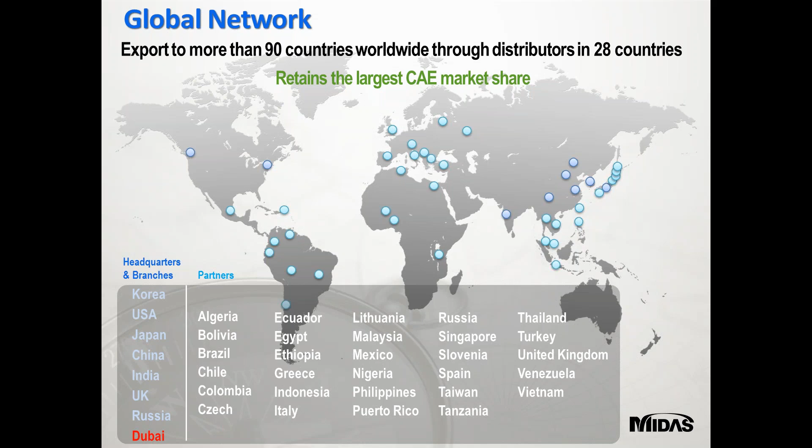Coming to the business area of Midas, it includes both engineering and consultancy and software developments in bridges, buildings, geotechnical, and mechanical engineering as well.

As I mentioned earlier, both consultancy and software development combined gives a very good synergy to obtain optimal solutions for practical engineering. That means in Korea, we have both software development and engineering consultancy service, which makes a very good synergy to obtain practically facing solution problems and sort out the solutions.

Coming to the product line, we have building and structural engineering products such as Midas Gen, which is a flagship product, named as integrated design system for buildings and any kind of general structures. Followed by Midas Design Plus, it's a structural component design and detailing tool. And coming to Midas D Shop, it's an auto drafting module.

In bridge and civil engineering, we have Midas Civil, which is again a flagship product for bridges and any kind of civil structures. The other one is Midas FEA, which is famously used for nonlinear and detail analysis system.

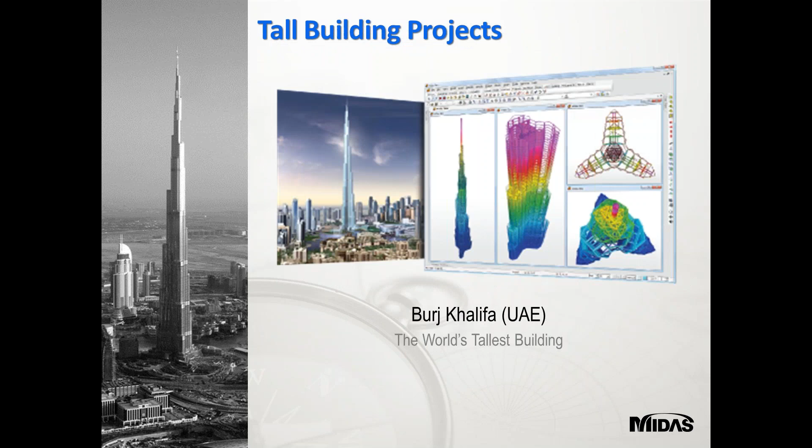These are again some of the applications where Midas Gen has been used: Burj Khalifa UAE, the world's tallest building, and Moscow City Palace Tower, Russia, a twisting 46-story building with composite columns. And coming to Gansu Twin Tower, China, a 103-story multi-use building.

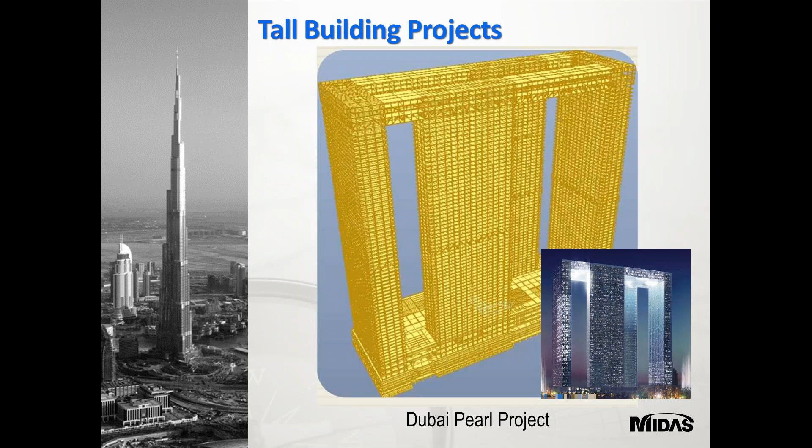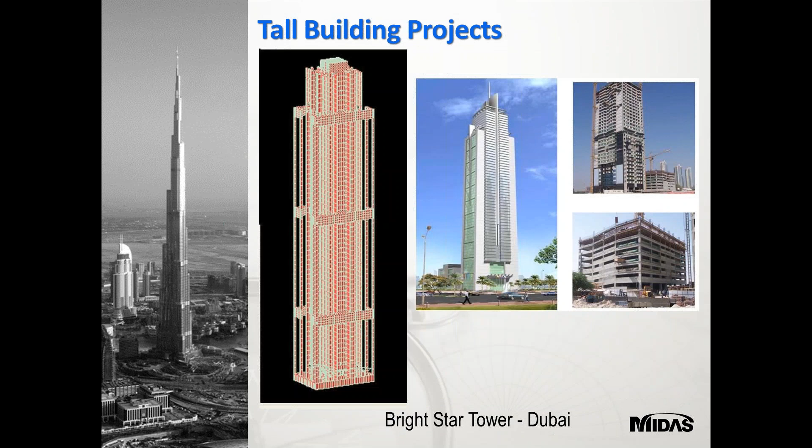And Dubai Pearl Project, and Rolex Tower, Dubai, ADFC building, and Signature Tower, Dubai. And coming to the other building, it's Bright Star Tower, once again in Dubai.

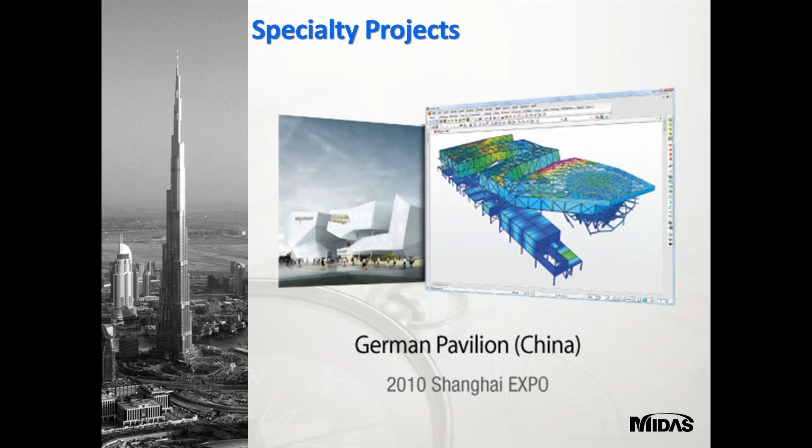And coming to Midas Bridge software, one of the flagship products, once again I would say it is Midas Civil, wherein the applications are Sutong Cable Stayed Bridge, China, Russky Island Bridge, Russia, and Sunda Strait Bridge, Indonesia.

These are some of the application areas for Midas Civil, like conventional bridges. You can do curved steel girders, composite integral bridges, PC girder bridges, and segmental post tensioning with BCM method, ILM, MSS, and FSM method. Also cable stayed bridges and extradosed bridges can be performed using Midas Civil.

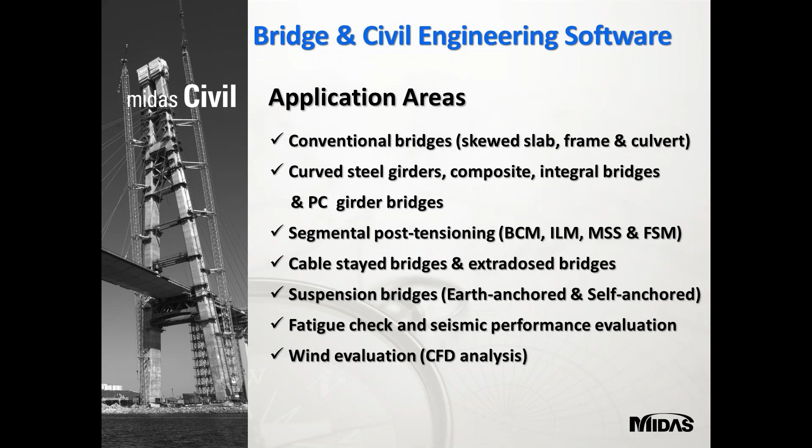And not only those, suspension bridges and fatigue check and seismic performance evaluation, and also wind load calculations can also be performed in Midas Civil.

Coming to geotechnical engineering software, we have application areas in Kingdom Tower, Saudi Arabia, where foundation design has been performed using Midas GTS NX, and also in New York subway, Midas GTS NX has been used, and also King's Cross Station in UK.

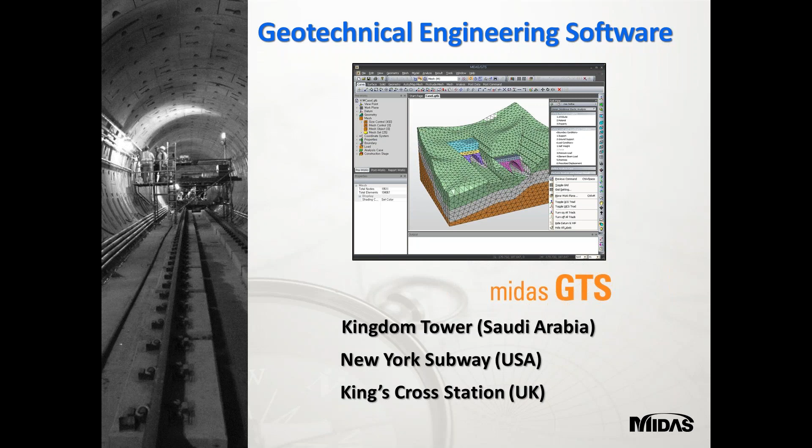Coming to the application areas, tunnel design you can perform in Midas GTS NX, and slope stability analysis and seepage analysis and design, like soft ground analysis, foundation and dynamic analysis, and also coupled analysis. In this way, I would like to proudly say that Midas provides complete civil engineering solutions, that is from substructure to superstructure.

Not only civil software solutions, but also we have mechanical engineering software solutions, which Samsung Electronics, Hyundai and Kia Motors are using. Also LG Electronics has been using Midas mechanical softwares.

Some of the application areas of Midas mechanical softwares are automotive and heavy industries, shipbuilding and maritime engineering, aerospace, electronics and environment and thermodynamics, and medical device and biomechanics.

The upcoming projects using Midas are Kingdom Tower, Saudi Arabia. As I mentioned earlier, it's the world's tallest building with 1 kilometer vertical height.

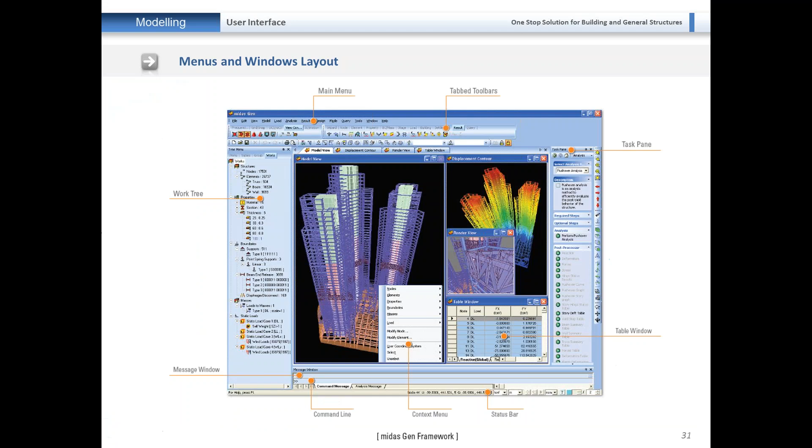This is the user interface of Midas Gen, where it provides various menu systems and windows for a user-friendly workspace. In addition, it provides supplemental windows such as tree menu, task menu, and a toolbar. I'd like to mention the task menu, which displays a work procedure for analysis, advanced analysis functions, and descriptions of input items. This helps the user to work more easily and comfortably.

I'll just open the software and click on new file.

If you see here, this is the main menu where view, structure, node element, and all the main toolbars are visible for you. And if you see the procedure of the alignment, this is the way to proceed and get the project done.

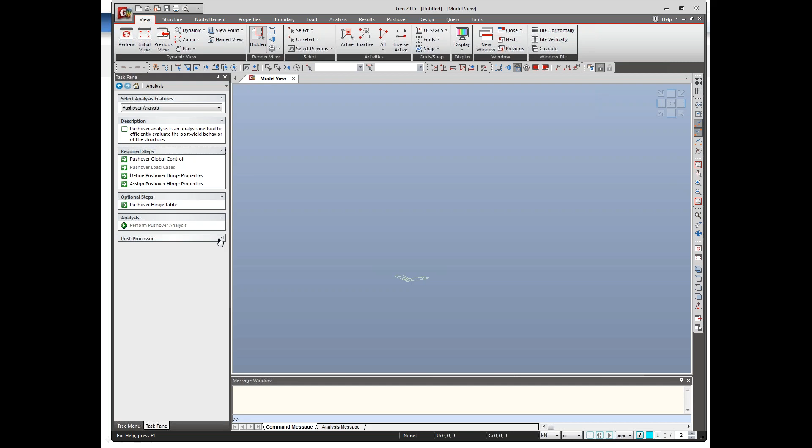These are some of the optional steps for you. You just need to perform analysis, not only pre-processing. Post-processor details are also available here, showing what results we need to go through after completion of analysis. All this kind of advanced analysis can be performed quite easily using Midas Gen.

For example, if you want to perform nonlinear time history analysis, you can directly see the required steps and optional steps, and also what results to check after analysis, even if you're not familiar with this advanced analysis.

Okay, now let's move on to another slide. These are some of the various useful functions and windows.

I'll let you know all the more useful interface during the demonstration. If you see here, these are some of the views. While modeling a brief project, we can go through all these features.

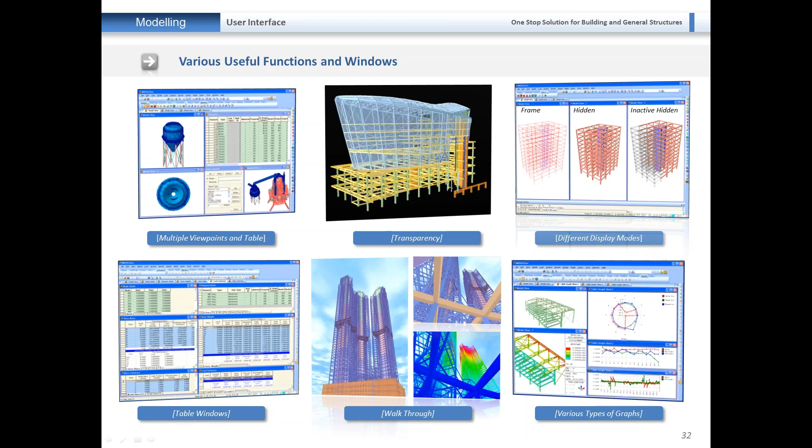Coming to data exchange, file manipulation is very crucial these days, since various engineers work with various softwares, and Midas Gen can fully handle file manipulation as well. Midas Gen provides direct data transfer with Tekla structures, Revit structures, and STAAD, importing and exporting AutoCAD, DXF, MSC Nastran, and also one can create an MGT file after completion of the project, and export the Midas project to some other softwares as well.

If you see in the software here, you have an import option. If you click on import, you can import the Midas Gen file itself to get a model, and also AutoCAD DXF file, SAP 2000, and STAAD file, MSC Nastran file. You can also export the Midas Gen file to Midas drawing file and AutoCAD DXF file, and export it to a Midas Gen MGT file.

These are some of the useful features.

Coming to the export and import between Midas Gen and Revit Structure, you can directly import a Midas Gen model to Revit Structure, and from Revit Structure to Midas Gen. Once after completion of the purchase of the software, we'll provide you a link from Revit Structure to Midas Gen, and you can simply import a complete model from Revit to Midas Gen through the provided link.

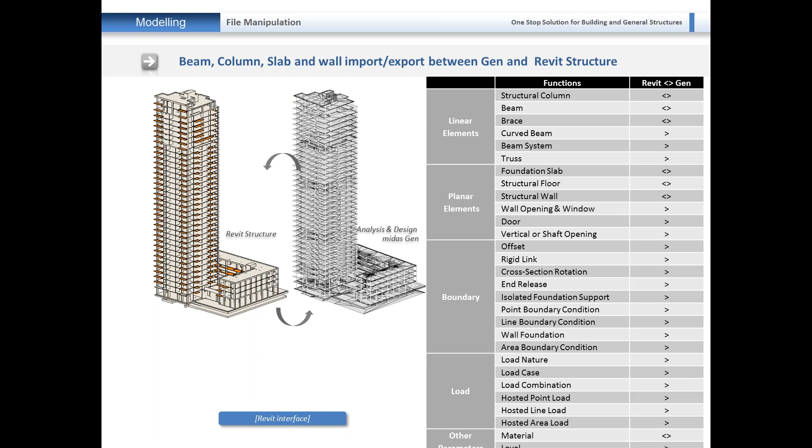For example, merge data files. In a complex project, a number of engineers can work on specific parts at the same time, and we can then merge the individual files into one analysis file and perform the analysis. Text type input using commands is also carried out through the MGT command shell, and the entire model data can be entered or produced in the text format of an MGT file.

Here are images where you can clearly see this project has been divided into various stages, and after completion they can simply merge it into a single analysis file and get the output.

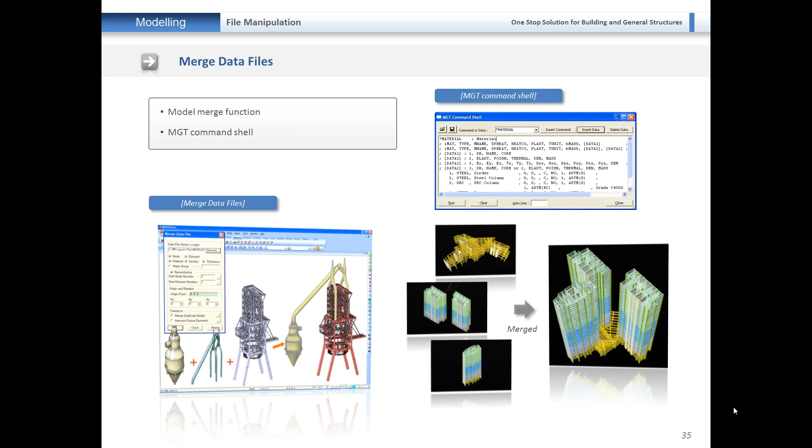Coming to material data definition, we have different standard databases, that is BS, American standards, Euro standards, IS standards, Korean, Japanese, Chinese, and all. We are also continuously adding more databases step by step as per requirement.

From here, I'll start the demonstration. I'll go to Structure and define a grid for you, that is Define Line Grid. Click Add and name it Global. Then click on X grid lines, click Add on X grid lines and give 5@3, click OK. Then add Y grid lines by clicking 4@3, click OK, and here the required coordinates have been obtained. Click OK, it has defined the grid, and if you need to apply right now, just click Apply. The grid line has been applied.

Click Close. See the usefulness of the work tree menu - I'll click on Toggle Work Tree. Here you can see the works you have defined.

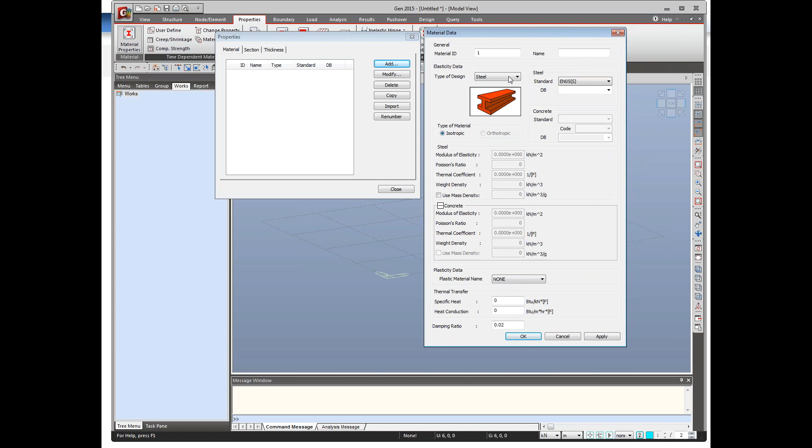Now I'll simply go to Properties and click on Material Properties. Click Add, and I'll define a concrete material property using Eurocode 4, C30/37, and you can name it if required. Click Apply and then Cancel.

Coming to the section, I'd like to define section properties for beam and column - user defined sections, solid rectangular. First, define the beam: depth 0.7 meters and breadth 0.23 meters. Click Apply - I'm clicking Apply instead of OK because the dialog box would disappear and you need to define other properties as well. Then click on Column. Define the column size as 0.45 depth and 0.45 breadth. Now click OK, and you can also define offset properties.

Here, if you click on center to center offset, or you need to move the offset from center top, or like center to center, center top, or left center, you can define this through change offset properties. As of now I need it as center to center. Click OK. Not only these, but we can also define several other section properties.

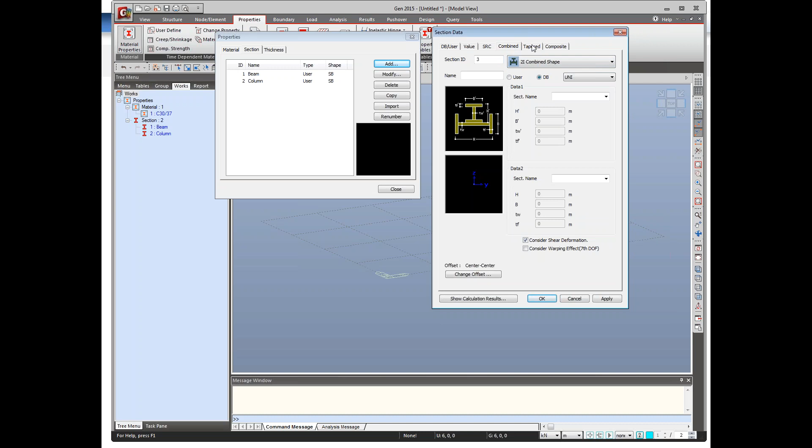You can have different types of sections like angle, C channel, I section - these are value input sections. You also have angle sections, channel sections, and combined sections, like combining two I sections, two T combined sections, and IC combined sections. These are some of the huge database section properties available. Not only sections but also material properties are available, and tapered sections also have a huge database available - you can define tapered sections as well, and composite sections can also be defined.

Click Cancel, and I need to define a wall element, so I'll give the thickness of the wall as 0.2 meters. Click OK, close. Now I'll go to Node/Element, then I just need to click on Create Element.

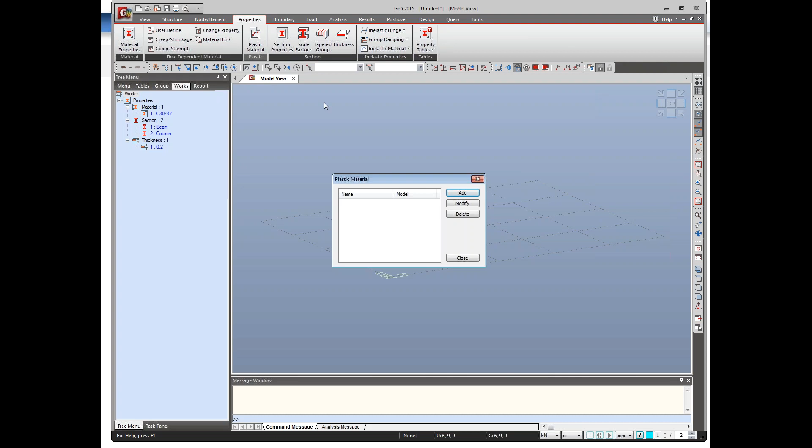I'll show you some other features in Properties. You can define plastic materials as well, like hinge properties which I mentioned - you have hinge properties to be defined over here. Plastic materials you can define like masonry properties - for masonry structures you can define masonry properties over here, and different types of tapered groups you can create, along with hinge properties. All of these can be done in Midas Gen.

Now I'll go to Node or Element, just Create Element. You can save it as auto save, or you can just save it manually - again, it will not ask.

I'll just save it on desktop. Now I'll click on create elements, and we need element type as general, beam or tapered, and the material property is same for both, and I need to create beams.

So what I'll do is click here to here, and again here to here. I'll go to top view for more clearance, and click here to here and here to here. This is the very easy way to create a grid.

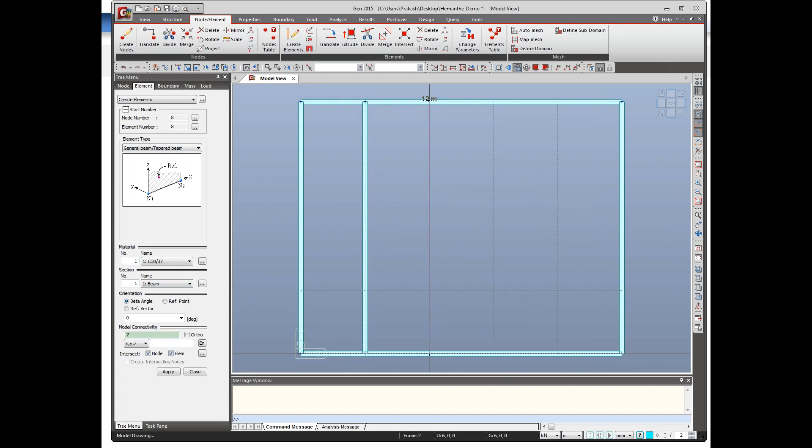Not only this, I'll show you some other way to create a grid in Midas Gen. Actually, I'm familiar with this method, so I'm quite comfortable with it, so I'm using this method.

Not only this method, I'll show you, if you go to structure, here we have base structures, like you can simply give beam, you can give the inputs as per your requirements, and you can get a single beam. For example, if you want to define a frame, you can give it input data and edit it, generate frame, then insert it at your required point.

Okay, I have a grid over here, and what I'll do is click grid line off. So the grid line has been turned off, and now I need to create columns.

So what I'll do is go to node or element, then extrude elements. See the smartness of the software. I need to extrude columns in minus Z direction. So I'll set extrude type as node to line element, then element type as beam, and material is once again the same.

So beam, generation type same, equal distance, and dz I'll give as minus 2 meters. Now I need to click on select all, so only the nodes will be generated as line element. Just click apply. See the smartness of the software. The columns have been created.

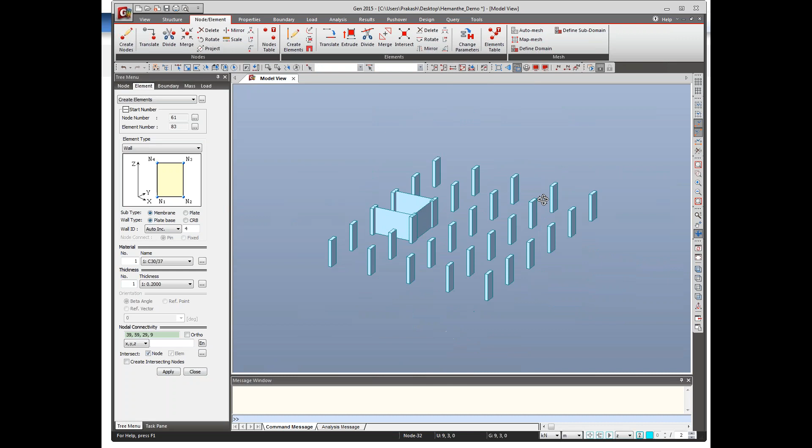So you can simply select those columns and click on delete. This is how you can delete the unnecessary columns. Just click on activate all. Here your original structure has been created.

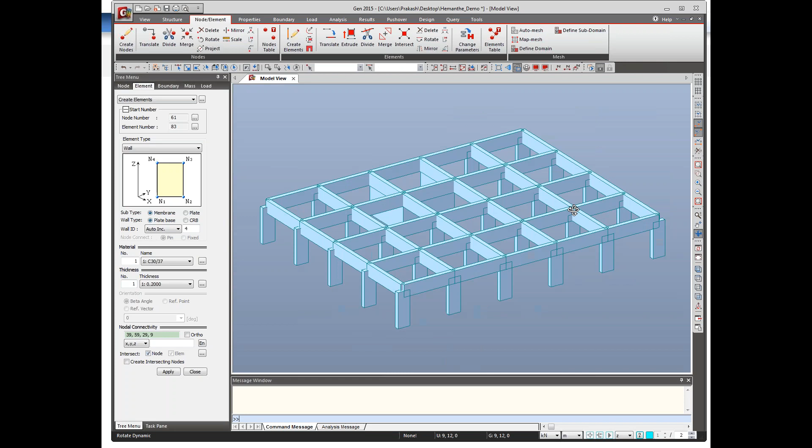Also you can delete the beams which are unnecessary. Like you can select, sorry, I need to click select none, then select the beams which are not required for you and just click on delete. So the beams also got deleted.

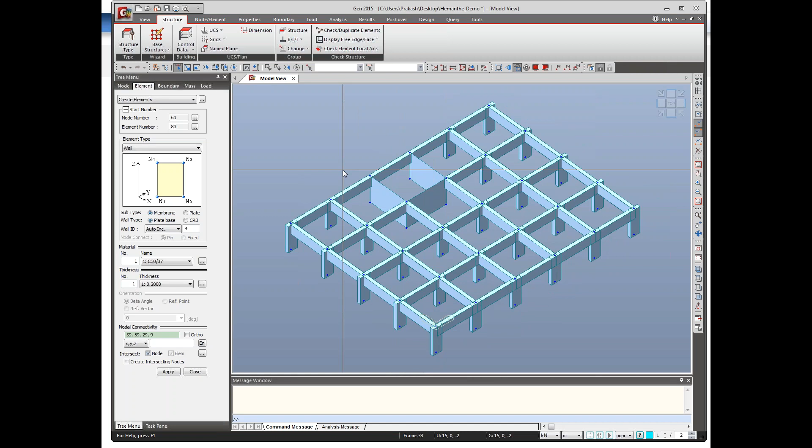Okay, and for the structure type, before analysis you can click on convert self weight to masses. You can click OK, or else you can click here, like for alignment you can select all these options and just click OK. Now the alignment is aesthetic for you.

Okay, now I'll move on to the presentation. The initial base structure is ready with us. Now how easily you can turn it into a building, that's what we'll look at in our next step. So now we'll move to the presentation.

So as I told you about the material database and all, I'll just move on. And also you can define time dependent materials for steel and concrete as well.

Coming to the section data, as I told you, we provide most of the section database, including Europe, America, Canada, Asia. The section database includes I sections, T sections, angle, channel, pipe, and so on. We can also provide various combined sections for steel members and tapered sections for modeling haunched beams as well.

For example, each and every time we'll try to include more and more database, whatever we get.

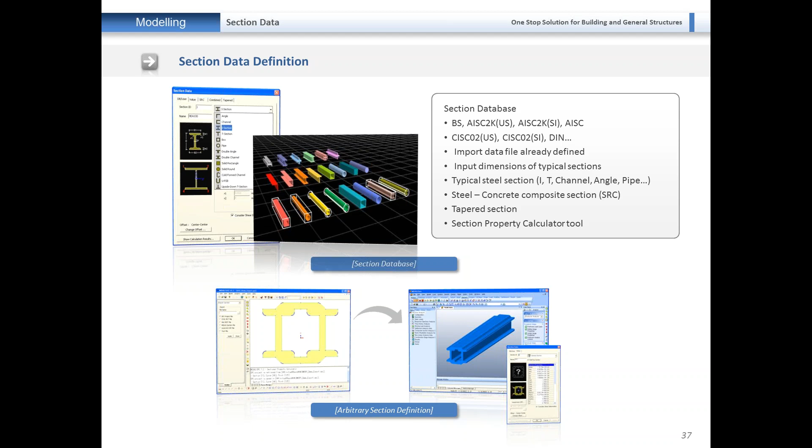Coming to the wizard options available in MidasGen, these wizards help you quickly generate models, reducing modeling time for typical shapes. Using the structural wizards, unit structures such as frame, arch, truss, plate, and shell elements can be simply modeled.

As shown earlier in the software, if you go to structure and base structures, you have plate and shell elements. Using shell elements, you can simply model a water tank structure and just apply hydrostatic pressure loads. You can also simply model plate elements as well.

Coming to slab modeling, there are two ways of modeling slabs in MidasGen. One is to model the slab using plate elements, and the other is to exclude the slab and consider it as a rigid diaphragm.

The property of the rigid diaphragm is that it transfers lateral loads to the beams and columns, and the mass data are automatically entered at the diaphragm centers. The center of mass is automatically calculated for each story, so you need not worry about it; the program automatically considers the center of gravity.

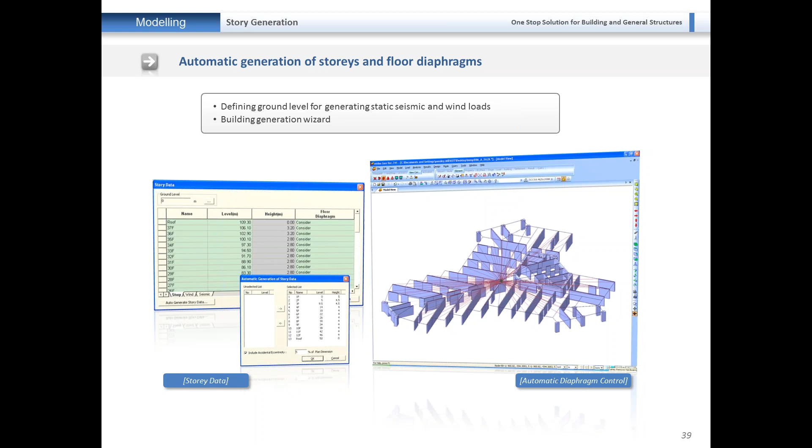Coming to mesh generation, it's generally quite difficult to create plate elements, but in Midas we have options like auto mesh, planar area, and map mesh 4-node area. For connectivity between slab and wall members, the program smartly takes care of it. You need not worry about the connection between meshed and unmeshed elements; it automatically handles nodal connectivity.

I'll show you those options as well. If you go to node or element, here you have auto mesh planar area. For type, you can define quadrilateral, quad plus triangular, or triangular line elements or planar elements. For map mesh, you need to select 4 nodes and then perform the mesh.

Define domain and subdomain. This is used when it's required for reinforcement, for example, when your structure is at 90 degrees.

For example, your structure is like this, then here you need to give the reinforcement along the x-axis, and here you need to give the reinforcement only along the y-axis. So you can define this entire thing as a domain and this as a subdomain, changing the angle direction. That's how it's quite smart and useful for reinforcement.

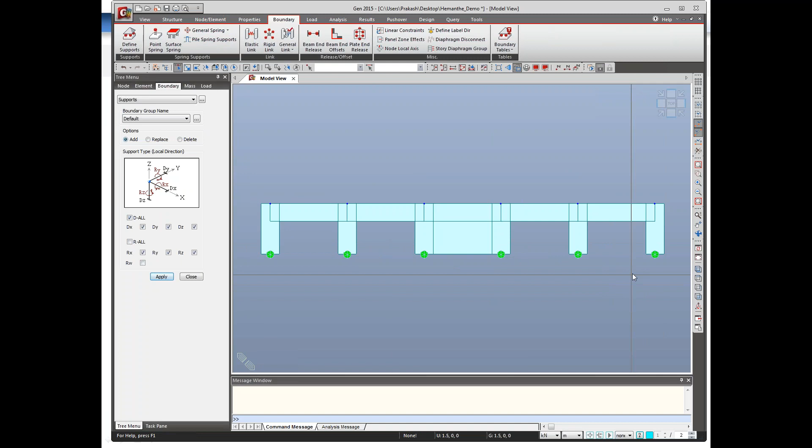If you want to see it in all directions, you can see your supports have been defined. If you don't want to display these supports, you can go to the works tree menu and undisplay them, so they won't be shown for you.

These are some of the options for spring supports as well, and elastic links, rigid link, general link, beam end release, all these things you can perform. Panel zone effects, where you don't want to consider the moment, you can give it as a panel zone effect. Diaphragm disconnect and story groups, you can also do in the software.

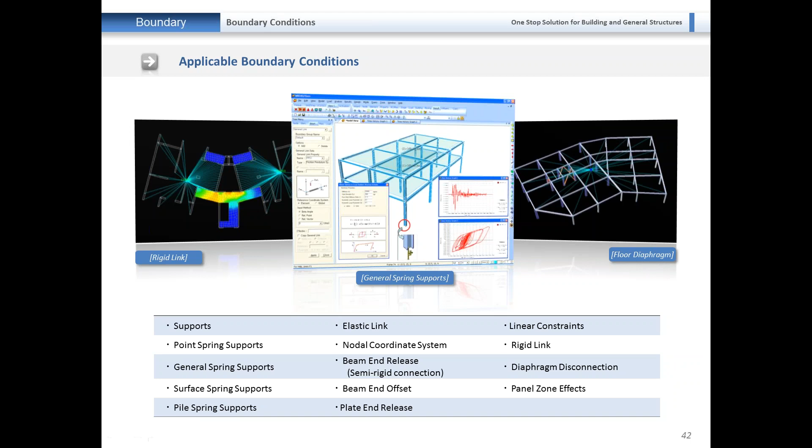Coming to the presentation: pile spring support considers soil stiffness, and nonlinear characteristics of springs or the pile height are automatically calculated in MidasGen.

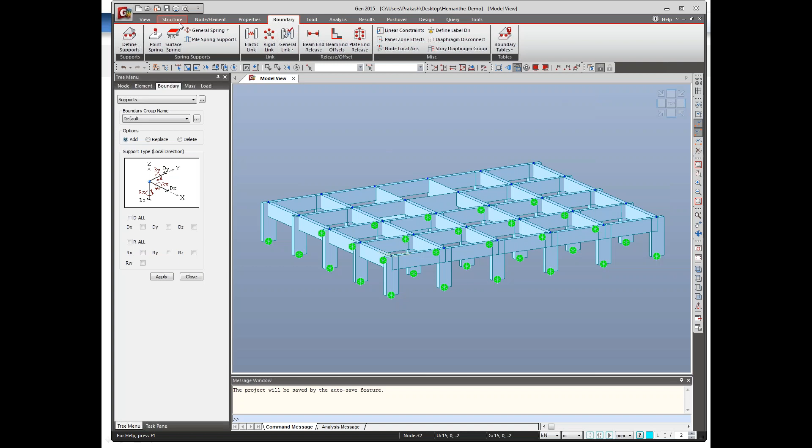Before that, I would like to generate the building. See the smartness of the software: I just created the base floor, so now I need to generate the building up to the top.

The number of copies is how many stories you want to create for your project, so here you can give it as 5, meaning 5 stories have been created. The distance along the Z direction is the distance between 2 stories; you can give it as 2 meters and click on add.

In the similar way, you can define other copies, for example, 2 stories at a distance of 3 meters. Just click OK, and if you click on this, you can get the building generation table showing how many stories you have and the differences between them.

Copy node attributes, element and building attributes. If you have any supports or anything else, they'll be copied to the entire stories, like static loads. Since I haven't defined my loads, I'll use an alternative method to generate loads. Just select all.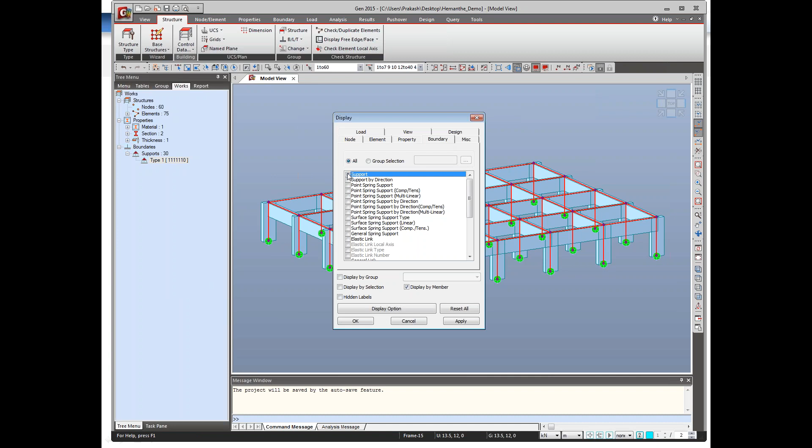I'll go here, go to boundary, and just click apply. Click on unselect all. Select all, control data, building generation. Give it as 5 copies and distance as 2 meters, click add, click apply.

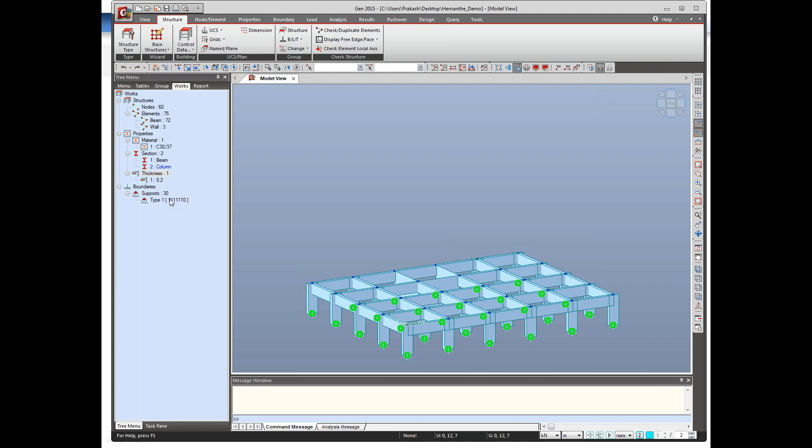So here your building has been generated in a smart way. The supports have also been copied, but we don't need the supports till the top level. So what I'll do is undo this step, undisplay supports, and then click on select all.

Before that, columns haven't been assigned, so I'll unselect all and give it as Z and select all. Walls I'll unselect. I'll right click and give assign. Now to check whether it's assigned properly, just double click on that. You can see the columns have been assigned with

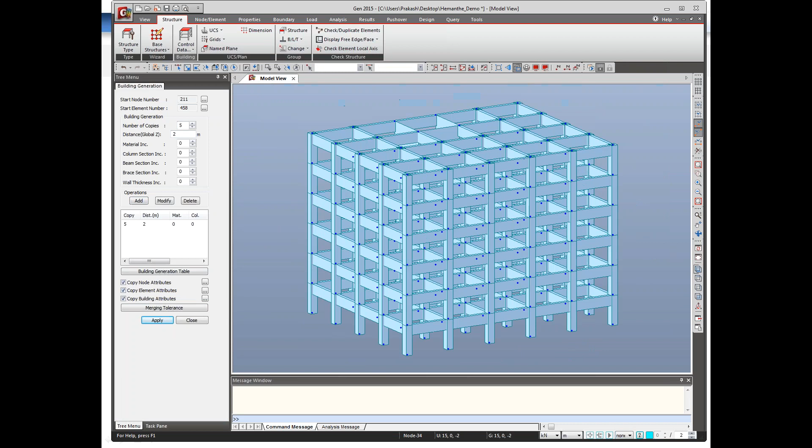required properties. Now I'll unselect all, click on none, go to building generation, 5-story, 2 meters, click add, click on select all and apply. Your building has been generated, and the supports are also

I'll delete the supports and define them here now. Go to boundary, define supports, apply. Your supports are also defined properly. This is the advantage of your workstree—everything can be handled using workstree.

Now going to the load properties, I'll define different load cases: give dead load and click add. Once again live load, click add, and wind X, click add, and wind Y, click add.

Live load, modify. Wind load on the structure, modify. Wind load on the structure, modify, and EY, earthquake, EX, click add, EY, click add. These are the required load combination load cases for me.

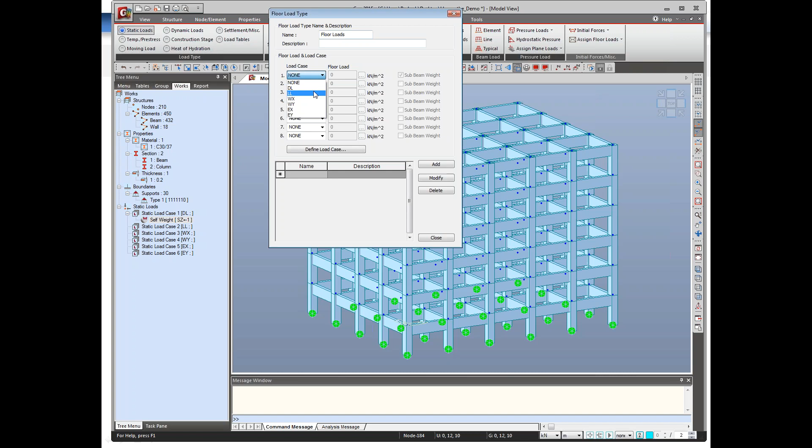So I'll give dead load as -4 and live load as -2 kilonewton per square meter, click OK, click close. What I need to do here is create another one for SIDL. You can give it as dead load. Click OK, close.

So define floor loads. You can select this and modify, SIDL, modify. Okay, these are my floor loads, and again I will define my roof loads as -5 and -2. Add. Floor loads and roof loads I have added, just click close.

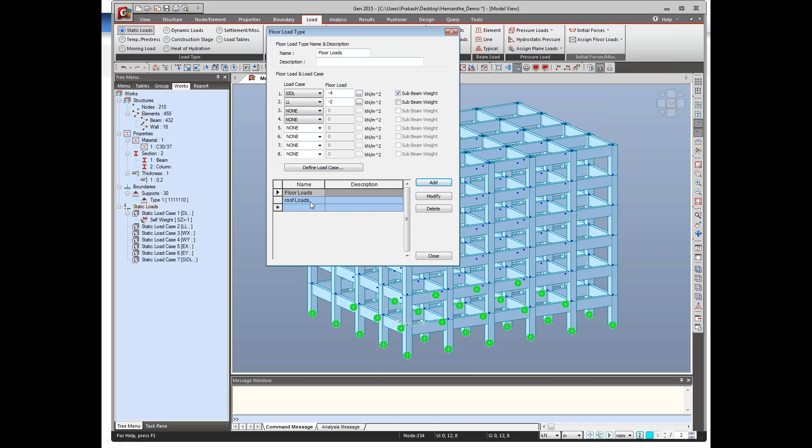So your floor loads have been defined. Now go to assign floor loads. I would like to assign the distribution as two-way distribution, though you can also define it as one-way. Just click on allow polygonal type unit area, and here is a smart option again. If the loading is inclined like local x-axis, you can define, or local y-z, and as of now I need it in global Z direction.

So I'll just click on this. Before that, I'll select this part, stories 1, 2, 3, 4. I'll activate this—this is my part that I have to distribute. Before that, I would like to activate and give the distance as 4 at the rate 2.

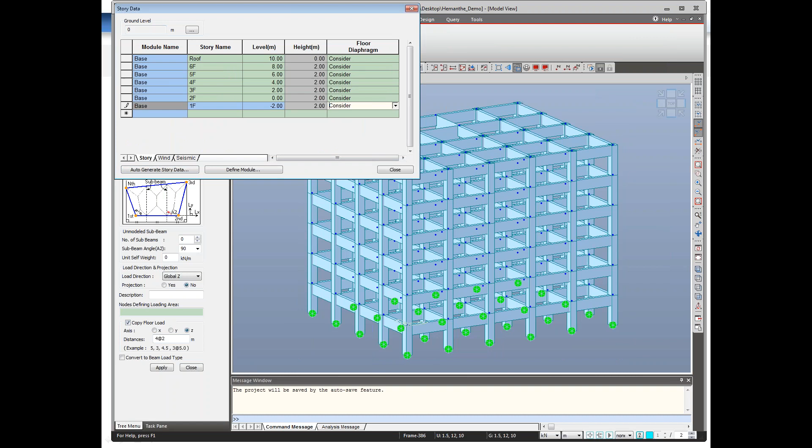Just click on activate all, and here you have to generate the story data. Click on auto generation story data. Your story data has been generated—this is the floor diaphragm which I have been talking about. You can select whether you need to consider it or not. For the roof also I would like to consider it, so I'll click consider, close. So now the story data has been generated, so you can look after your stories.

So here I would like to activate it by identifying a story. I'd like to activate the first story. Just click on activate all, then click on activate. First story, you just need to select floor and click on activate.

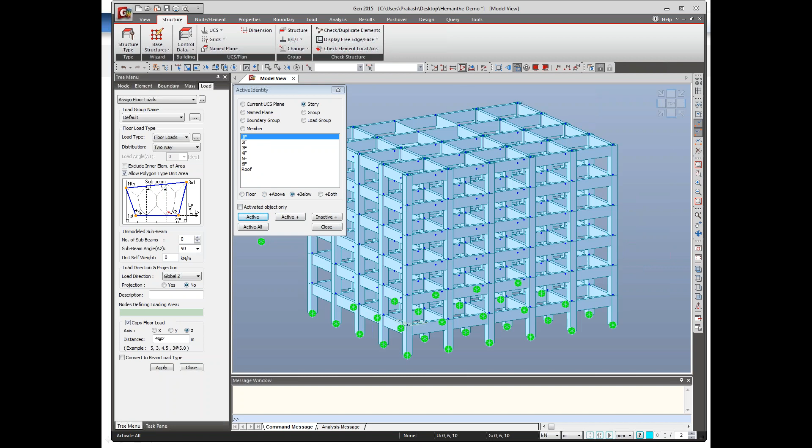There are many options available for us. Just select all, and I'll select this story, and I'll just click activate. So this is the story.

You need to apply the floor loads. Just click over here and apply your floor loads. The floor loads has been applied. Yeah, this is the way you can apply your floor loads.

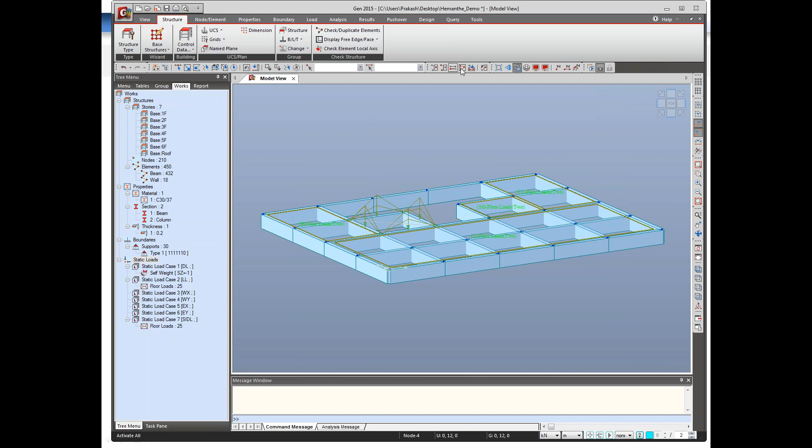Has been applied, and now I would like to click on activate all. The roof load haven't been applied, so I'll just select my roof. Just click on activate all. Go to top view. Here I'll assign the roof load. Roof loads, similar way.

Here I haven't selected the wall element. You can even select the wall element, and you can assign the floor loads. I haven't selected the wall element over here. You can select it, and one can assign it actually.

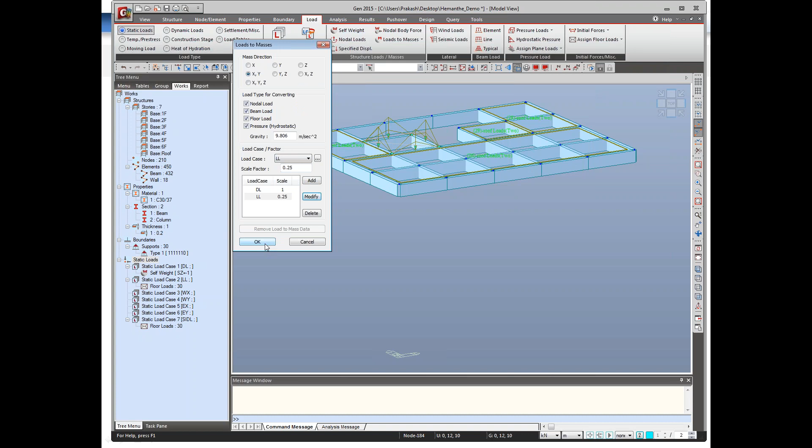Now I would like to click over here, load to masses for seismic analysis. Give dead load as 1 and live load as 0.25, and just click add. Click on modify. And if you want to define other loads as well, you can just define, click OK, activate all. Here you can clearly see that all the loads has been lumped as masses.

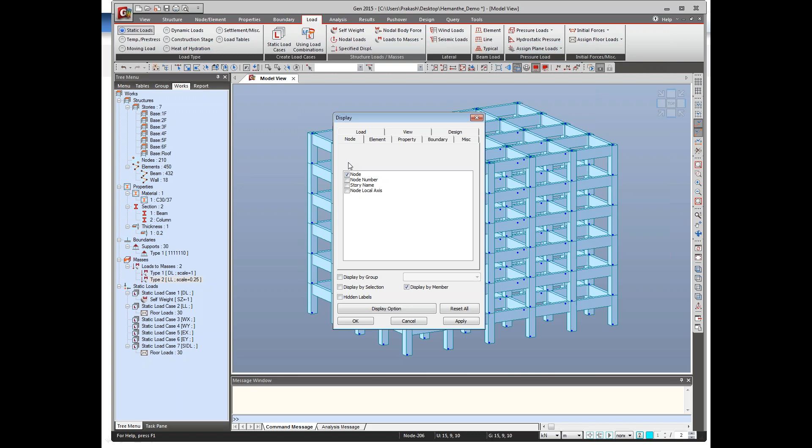Okay, and here we go. I'll define wind loads. Just click add. Okay, before that I'd like to go to presentation.

As I already mentioned about loadings and all, this is the floor loads, pressure loads and hydrostatic loads which you can easily define and apply in MIDAS-Gen. The floor loads are then automatically distributed and applied to the individual beams, girders and columns. This surely leads to speedy analysis and design.

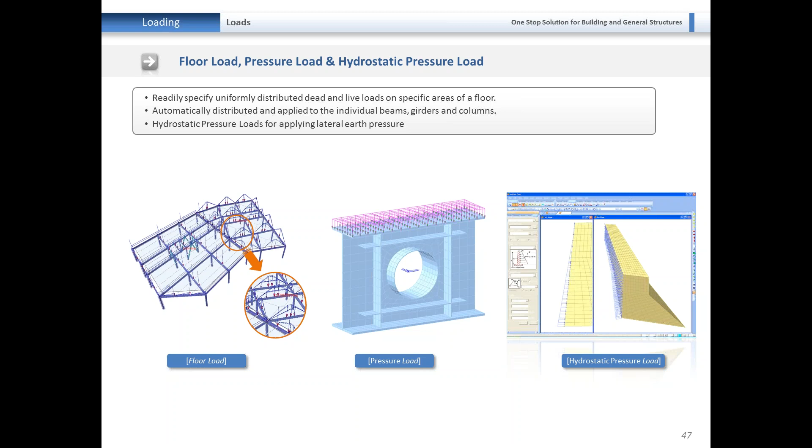Coming to static wind and seismic loads, MIDAS-Gen generates static wind and seismic loads on building structures for each story. All one has to do is provide the applicable standard and the story data so you can automatically create static loads. Coming to the response spectrum load cases, principal axis of the building are generally two mutually perpendicular horizontal directions in plan of a building along which the geometry of the building, and in MIDAS-Gen there is a smart option, auto search of principal axis.

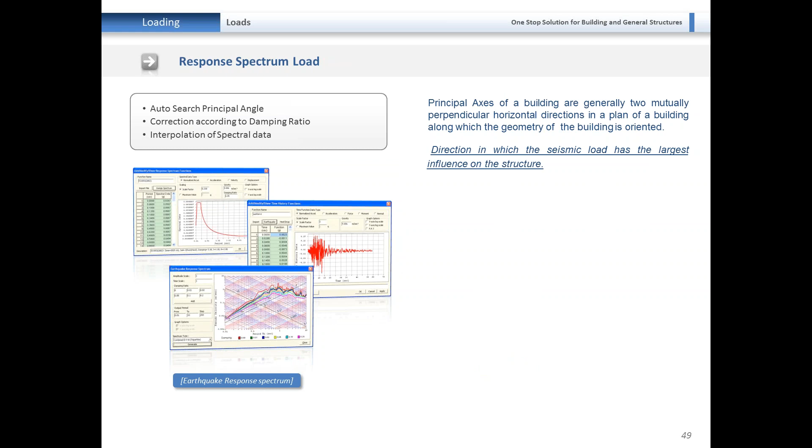For example, if your structure is irregular and you cannot find the principal axis, for a structure like this you can give Rx as 0 and Ry as 90 degrees, but for a structure like this you cannot define the principal axis. In this case the program helps you to define the principal axis, using the auto search principal axis option, which will help you define it automatically.

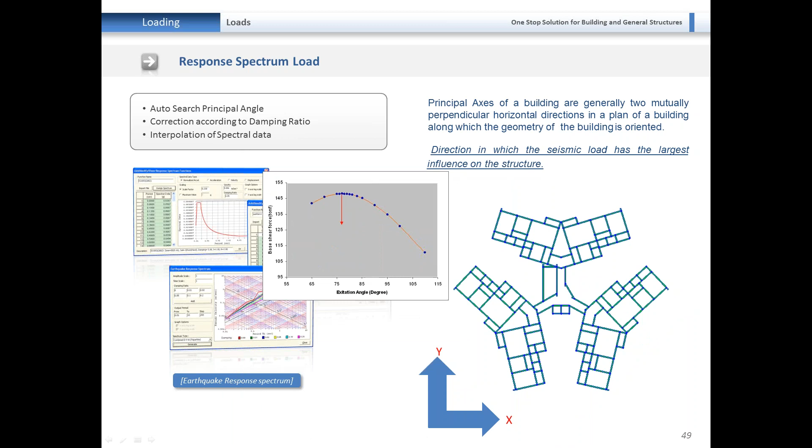These are some of the irregular structures where you can define the principal axis. Coming to the response spectrum load cases, you'll get a graph over here, and according to that you can define the load cases. These are the methods of the software used in MIDAS-Gen.

You can even get interpolation of spectral data using linear method or logarithmic method. I'll just show you all these techniques while defining the load cases. These are some of the dynamic load cases. Seismic analysis considering dynamic loads can be handled by the program.

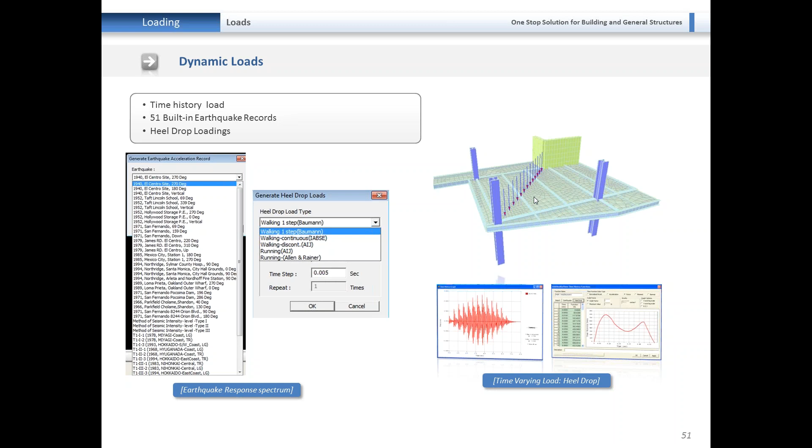This model has been made for evaluation of floor vibration due to walking load. This shows the walking load path for you. There's a time history function dialog using time history load cases and analysis.

Coming to the analysis capabilities, before that I will define wind load cases in the program. Just click add. I'll just do it quickly. The time is getting out.

Just select Eurocode, Wind Load X, and you need to define your terrain categories and all the inputs you need to provide. Here you just need to click on apply, and you can see the wind load profile, showing story force, story shear, and overturning moment.

In the same way, you can see the method as well, SRSS, square root of sum of squares method, or X direction, Y direction. The important thing here I would like to show is make wind load calculation sheet. If you click on this option, you will be able to get the wind load calculation sheet, like as per Eurocode, what formulas have been used and how the story force and story shear have been calculated.

I would like to mention that the program is not a black box. Everything you can get, like a calculation sheet, to see what formula has been used and what result has been obtained. All these things can be visible, and you can even take a printout of this or save it as a Word file.

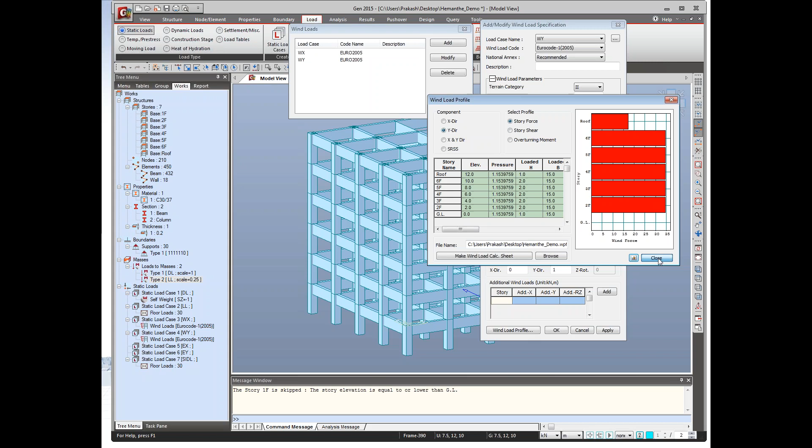Okay, WX has been applied. I'll just select WY, and here I'll give X as 0. Just click apply. WY has been applied. In the similar way, you can check out both wind load calculation and story force. Just click cancel, just click close, or you can modify it as well, like Y direction, I'll give 0.

Just click OK, close. Now coming to the seismic loads, the same way you just need to click on seismic loads and click on add. EX, the load case, the code you need to select is Eurocode, the latest one. And here you need to select the fundamental time period formula. I would like to use the first formula, so just select first formula and then just click OK. And along X direction, so Y will be 0. Just click apply.

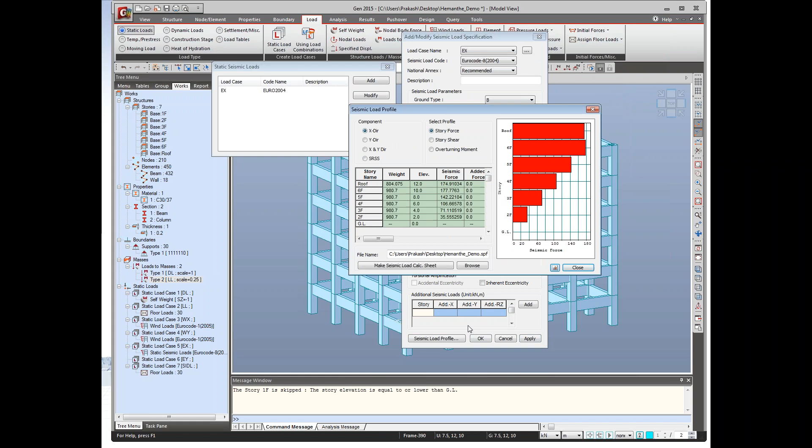In the same way, you can find seismic load profile, and also the same way you can provide seismic load calculation sheet with what formulas the program has been using. Here you can find out that the program is not a black box giving blind solutions - every output is visible for you. Just click close. Again, click on EY, and the same formula, I'll give X as 0 and Y as 1. And then just click apply, then cancel, close. See how easy I have defined all this.

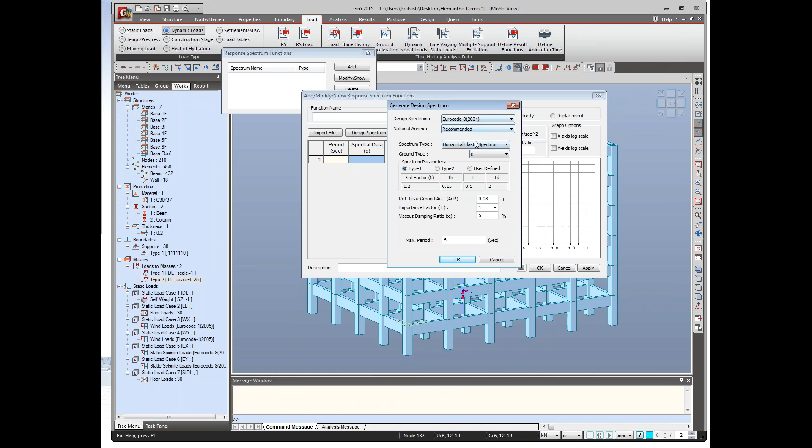Now go to dynamic loads and response spectrum functions. Just click add. And design spectrum, I would like to go for Eurocode latest one, and just maximum period I would like to define 6 seconds, and just click apply. Or else if you have any Excel file with the data, you can just import that file by clicking on import option. Just click apply and just click cancel, close.

And response spectrum load cases, Rx, you can give excitation angle as 0 and select this. Just click add. And Ry, you can give it as Y, 90 degrees. Since this is not an irregular structure, I'm giving it like as you know. And here I would like to define eigenvalue analysis control for modal participation factor. You can define 15 frequencies, and you can even define the method, whether Lanczos or subspace iteration or Ritz vectors method. Just click OK and click close.

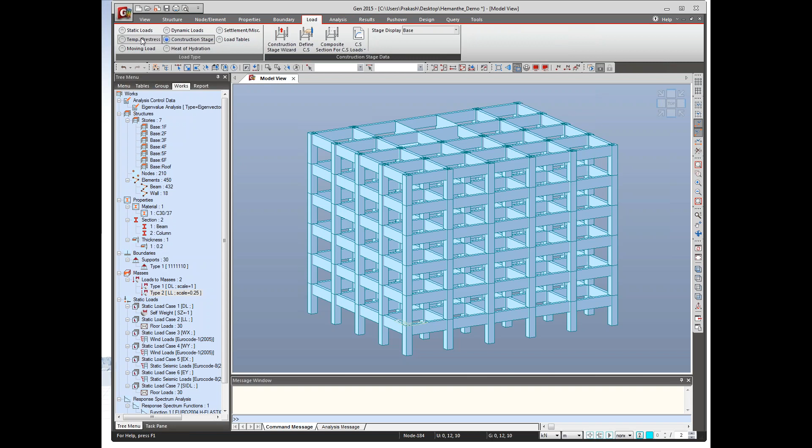Now there are different methods for dynamic analysis. One is response spectrum, which I have used now. Even you can go for time history analysis also. And there are different material settlement analysis you can perform, moving load analysis - this is advanced version of the software. The only difference is construction stage and moving load, construction stage will be added in the advanced version of the software. So now I would like to go for analysis, and analysis main control data.

You can define as per your requirements. And P delta analysis, you can perform buckling and everything you can do. I'll just click on perform analysis. Let us see how much time it will take to perform analysis. Yeah, the analysis has been completed, within very few seconds.

And here we can see some abnormal deformations. So maybe there might be some duplicate elements existed in the structure. So before running analysis, I'll just click on check duplicate elements. Okay, there are no duplicate elements. I'll just perform analysis.

Yeah, degrees of freedom, there are some issues with degrees of freedom. Anyways, this is the model file. I'll just open already - I had already performed the analysis file. Just open. I'll just go to presentation of the gen.

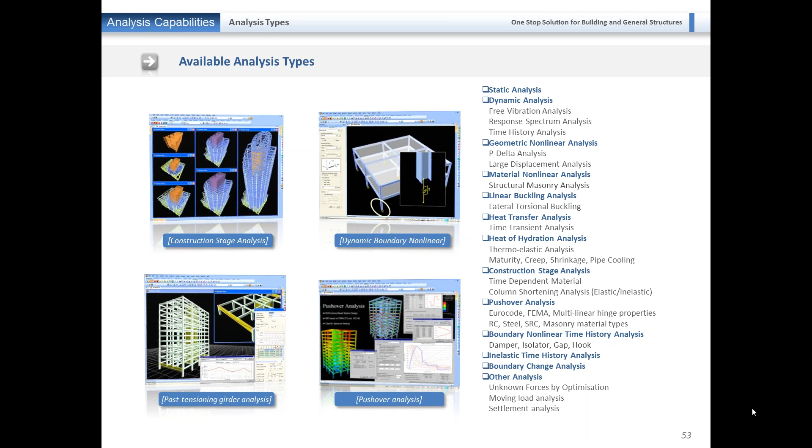Coming to the analysis capabilities of the software, MidasGen can handle high-end analysis capabilities such as construction stage, already I have shown you, and these are the list of analysis capabilities over here. These are some of the construction stage analysis, creep and shrinkage, and even floor vibration analysis can be performed. Serviceability of floor structures can be evaluated by dynamic time history analysis, and MidasGen provides a number of time history forcing functions for walking loads for floor vibration. And these are some of complete floor vibration analysis result display.

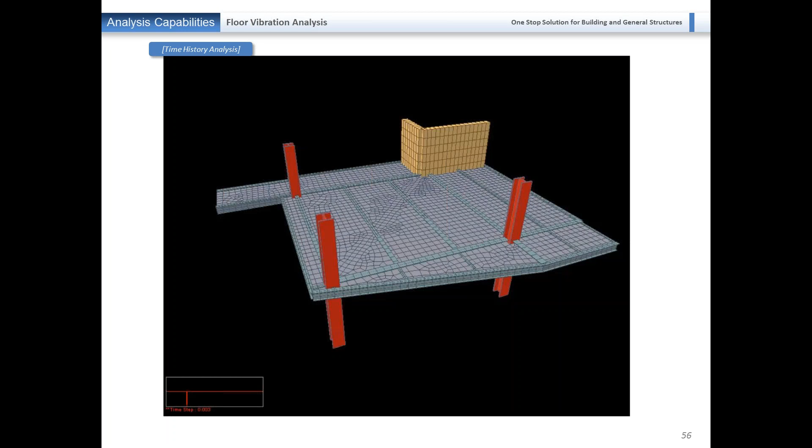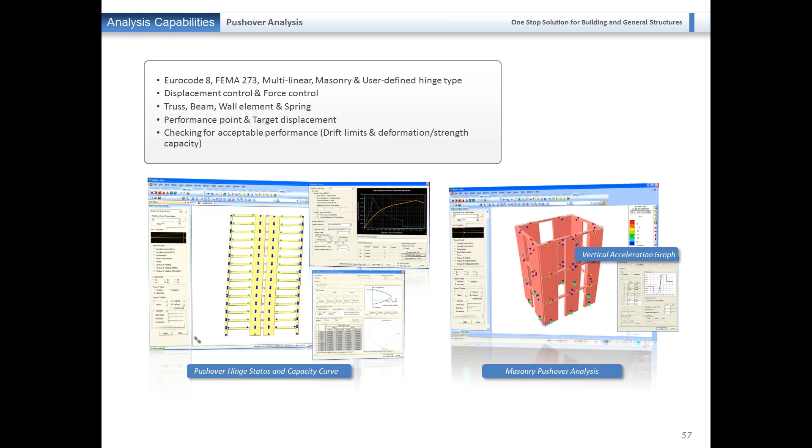You can also perform pushover analysis and inelastic time history analysis for seismic design and assessment of structures.

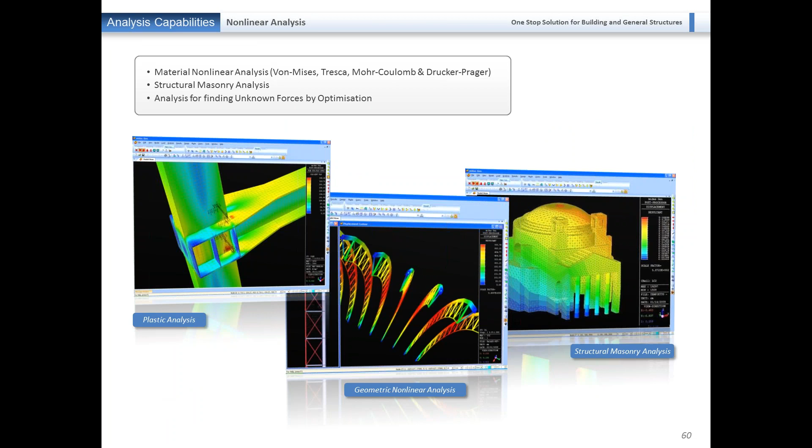You can perform heat of hydration analysis through heat transfer and heat stress analysis. Nonlinear analysis can also be handled by MidasGen, including structural masonry materials, and here are some examples of masonry structures.

Coming to post processing, after completion of analysis, MidasGen is very versatile in providing all analysis and design results in contour form, enabling intuitive evaluation. Member forces for weak and strong axis may be viewed simultaneously in the beam diagram. Using beam detail analysis, member displacement, forces and stress can be examined at various section locations, and any point in any section can be examined as shown in the figures.

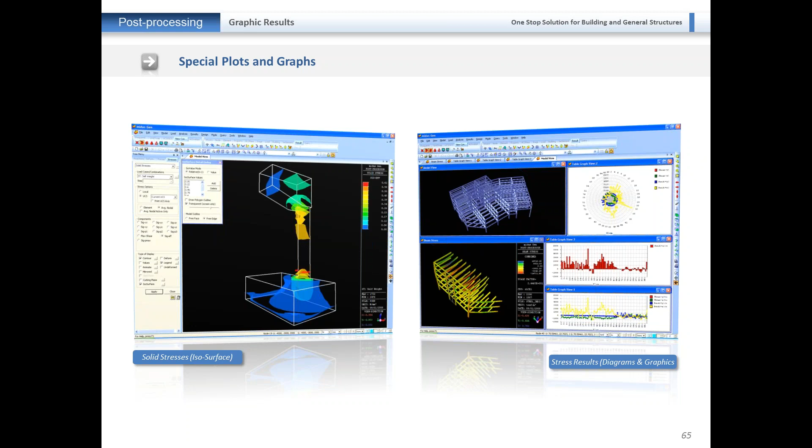These are some special plots and graphs. I'd like to show you the software's table outputs. This is an important feature: whatever results you get, you can simply export into an Excel file.

For concrete design, I'll click on auto generation of load cases. Here you can give Rx as 1 and Ry as 1.3, and calculate it. Just click OK, and these are your automatically generated load cases. You need not create them manually.

If you need any special load cases, you can create them manually. Just click close, and the program automatically gives you the load combination.

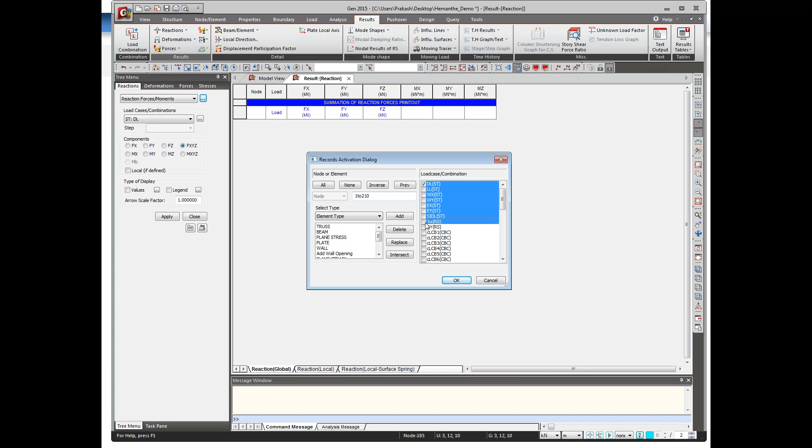Now checking reactions, just click here, select none, and click OK. These are the reactions along the FZ direction.

You can export it directly, or show it in graphic format, or export to Excel directly. All these are smart options from the software.

Just click close, and you can also check deformations, the deformed shape of the structure.

You can even get videos. If you click on animate, and then click record, you'll be able to get videos as well. Just click close.

For beam or element diagrams, like beam detail analysis, you'll get this for each and every beam you select.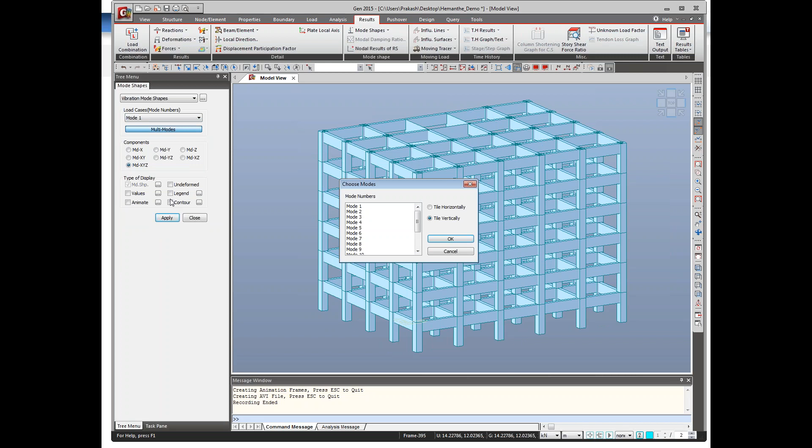Coming to the mode shapes, vibration mode shapes, you'll get them here. If you select the multi modes option, for example 4 modes, click OK, and you'll get all 4 mode shapes in the program itself.

Just click close. For result tables, whatever results you need regarding reactions, beam or plate elements, or supports, everything is available, and can also be generated in Excel.

Just click on initial view, or you can click close all. If you click initial view, you'll be able to get the initial view.

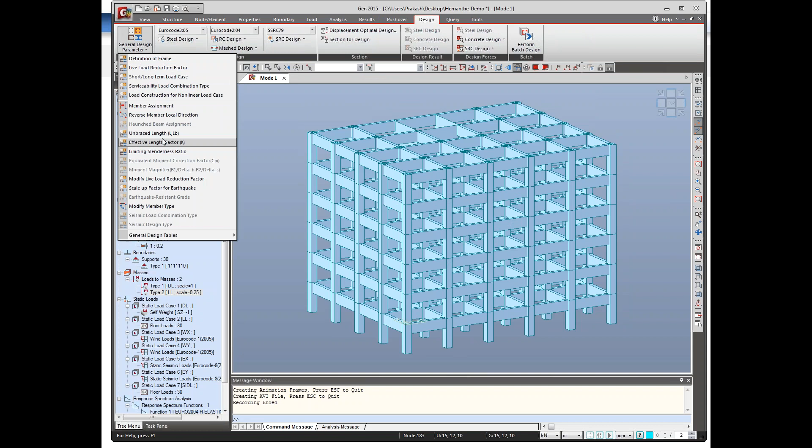Now coming to the design option, general design parameters, you can define the live load factor, and also the member assignment, which is a smart option.

For example, if a beam is divided into two for modeling purposes, with a node in between, but as per design you need to consider it as a single beam, select this beam and click apply, or simply click the automatic option. If you click apply, all such beams divided for modeling purposes would be considered as one for design purposes.

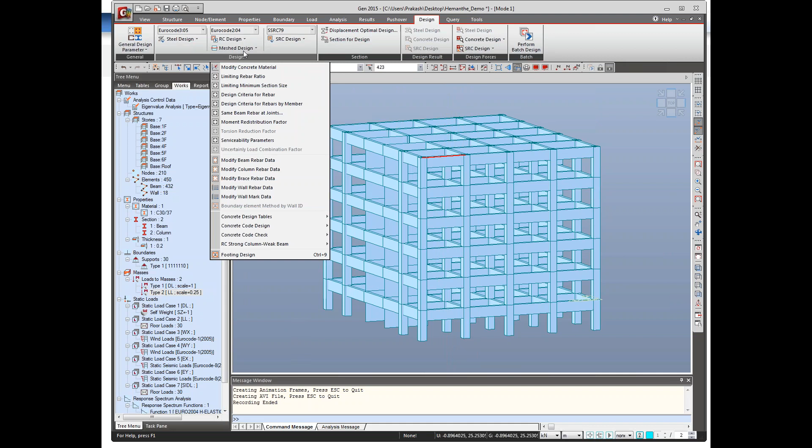Similarly, I'll go to design code, select Euro code, and update all the factors as per the code. Click OK, and I'll go for concrete code design, beam design.

I'll just select a few beams for now, since running all of them will take a long time. Let me unselect all and select a few beams here.

What? I'll just select a few beams, concrete code design, beam design.

This is the design section for you. It is shown in red, meaning there is some abnormal deformation in these sections.

Let me unselect all and select just one, then click on graphic view. These are some of the reinforcements provided for the beams. It's showing abnormal deformation, which is causing some issues.

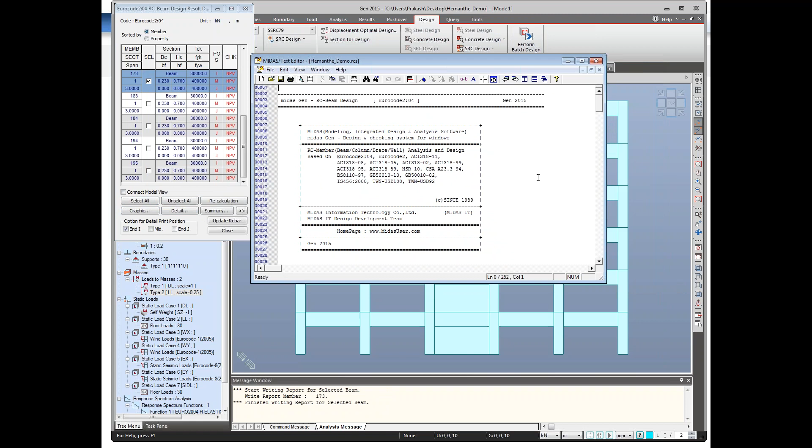If you need detailed analysis, you'll get a detailed report about the design here, such as the neutral axis location, negative bending moment, positive bending moment, and all such information. This same file can be printed out or used as you want.

This is the short format of the design section, where you need to update the rebar if required. Now, the smart option I'd like to mention is that there are some issues with these sections.

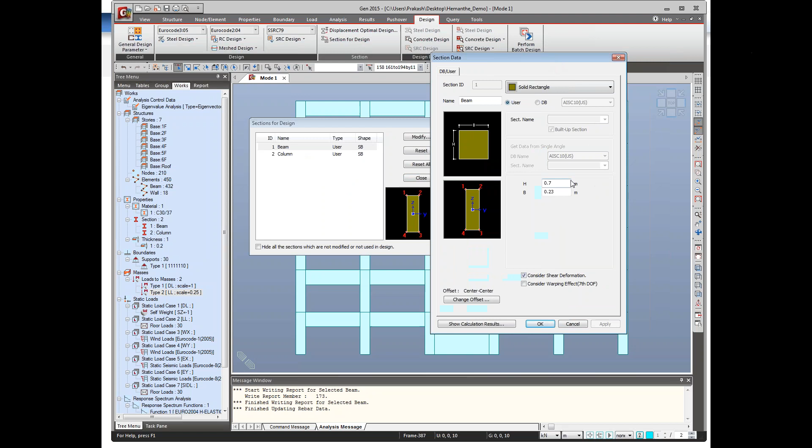So some of the sections are not passing in the design, so here there is a smart option for design. You no need to unlock the model and go back to pre-processing mode, you need not do all these steps. You just click on section for design, click on beam, modify, and it will directly modify and update the rebar. You can directly change the section here. So just close, and I'll perform column design as well for a few.

Select column, concrete code design, column design.

In the same way you'll be getting graphic view and detail view, and you'll also be getting the PM interaction curve. If you click on graphic view, you'll be getting all these things, including the PM interaction curve.

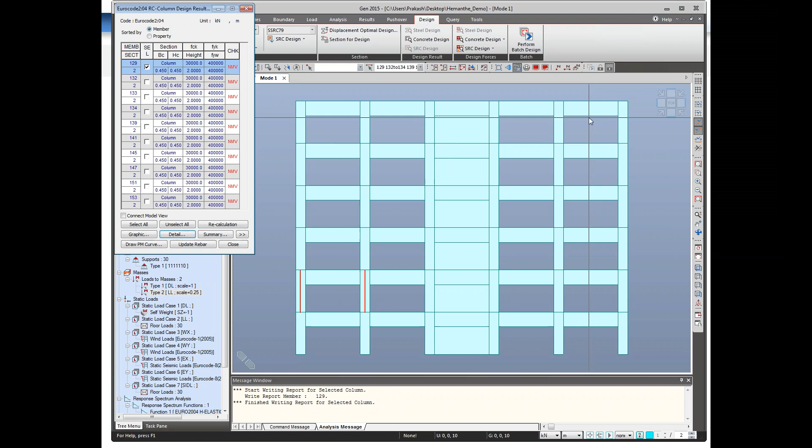Just click close, and if you want detail for this, if you click on detail you will be getting all these detail things, and these are some of the reinforcement provided for columns. Just click close, and coming to these are some of the design options like SRC design, which you can perform.

Coming to tools, here you have some important options like report generation, dynamic report generation. If you click on generator, a new Word document will open, and you can automatically define the report generation.

Now, this is the Word file created. Whatever you need, you can simply drag and drop here, like Green Tech Consultant, your company name. So this is how you initially create one official format, and then you can use it for each and every purpose. For example, just click close.

See here, if you right click on the model, you can get dynamic report image. If you need to put this particular image in the dynamic report generation, you just right click and save the image. Here you can find the report option, where all the things will be saved, and whenever you click on the generator, you will be guided into the Word file. You just need to drag and drop from here, the same as done in the model.

Now I would like to quickly move to the presentation to end this session.

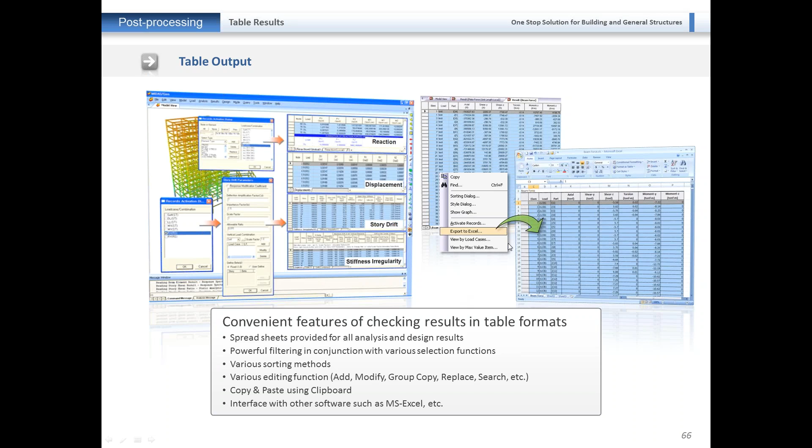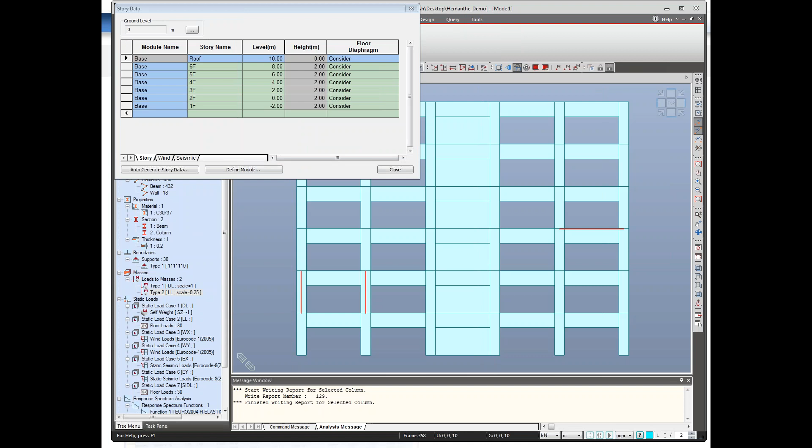These are some of the table inputs, as I already mentioned, and story related tables. If you have different story levels, you can even create it as per the modules, like control data story. Like if you have two different story levels, you can create the first one as module 1 and the second one as module 2. These are some of the flexible options I would like to tell.

Torsional irregularity check can be performed in the program, and stiffness irregularity check, like soft story, you can also check out in the program.

Wherein in design plus you can perform slab design, footing design, and shear wall design, staircase, buttress design, beam for ACI codes. And also for Eurocodes you can perform footing design and wall design.

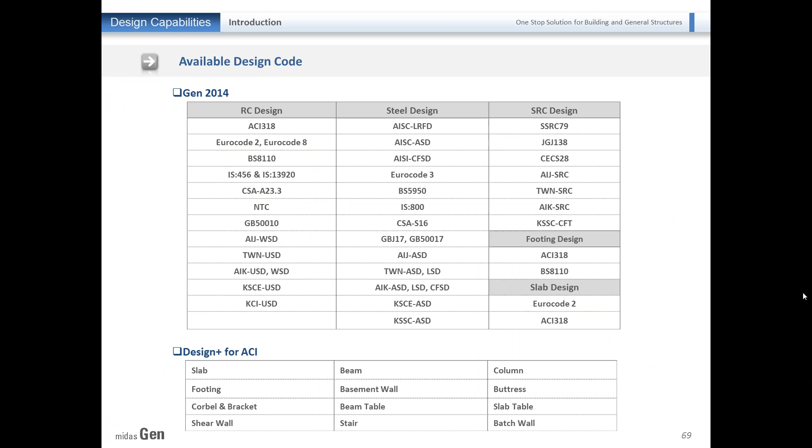Meshed slab and wall design is also available. Sorry, actually I haven't shown you wall design. Just select one wall and go to design, click on RC design, concrete core design, wall design.

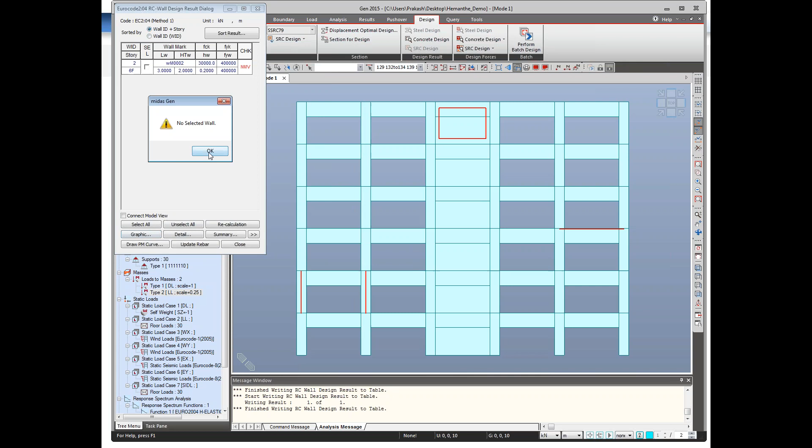You'll be getting the wall design as well. Graphic view. This is a quick view about the wall design, MN interaction curve and shear force check, and details. If you want to get a detail the same way, you can also get the PM interaction curve.

This is how the program provides you. Even we have meshed slab and wall design as per Eurocode. Even you can perform footing design in the software directly, you don't need to go for some other software.

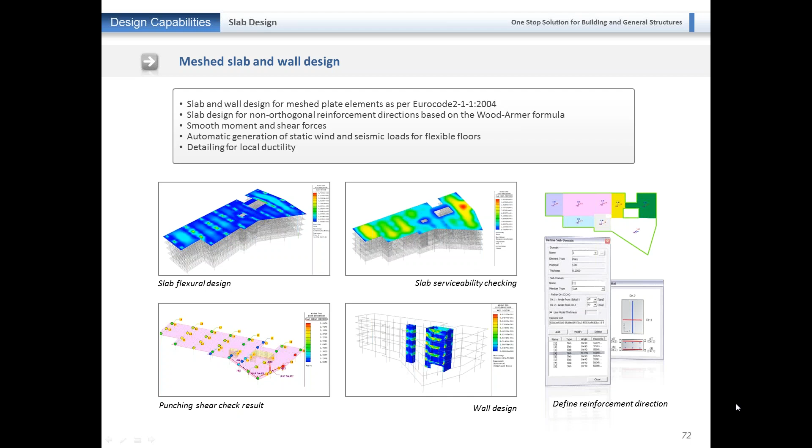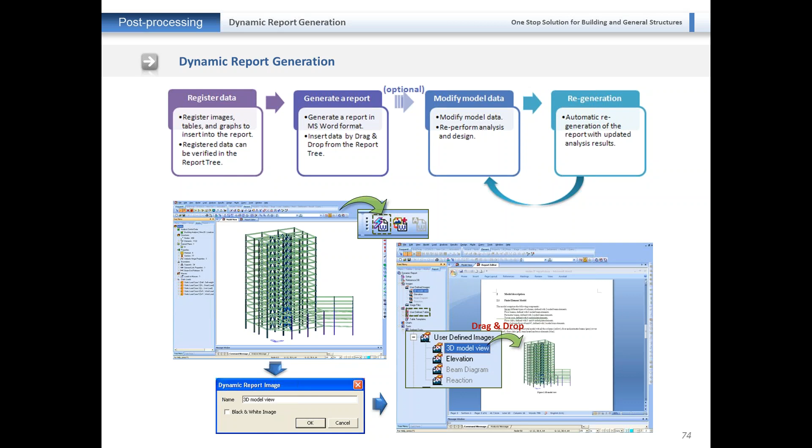And the next thing, this is about design plus. What are the features available for you in design plus?